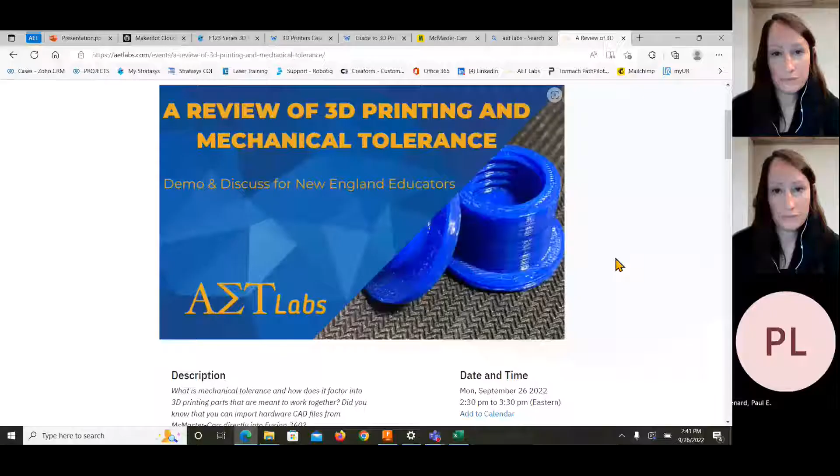Okay, so our topic today, give me 1 second here. Just gonna go ahead and share my screen. And Kristen, we're recording, right? Yeah. So I'm just popping over to the website where you guys registered.

So the topic is a review of 3D printing and mechanical tolerance. And mechanical tolerance is a very deep subject when it comes to machining, additive or subtractive manufacturing. So we're just going to touch on a little bit here today, like what is mechanical tolerance, and how does it factor into 3D printing parts that are meant to work together.

The other question, which is good for users of Fusion 360 and probably some other software too. Dave, you might be able to speak to this, maybe in SolidWorks, but you can import McMaster-Carr parts or hardware directly into projects. And when we say McMaster-Carr, we're talking about this touchstone for ordering hardware of all types. McMaster-Carr is a very well-known hardware supplier, and this is their website here.

Okay, so mechanical tolerance. I think the first thing I'm going to do is jump right over to my CAD software. Dave, you mentioned Onshape, and I have not spent much time in Onshape, but the other day I met with a teacher who had some questions about the laser cutter workflow and making 3D designs to bring to a laser cutter. I said, okay, I'm not entirely sure about Onshape, but let's just jump in and give it a try. And within 5 minutes, I was able to navigate Onshape and figure out how to work through that process.

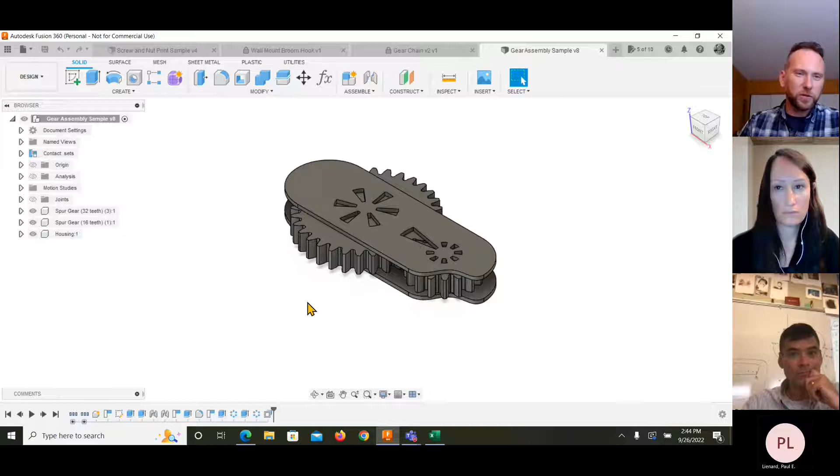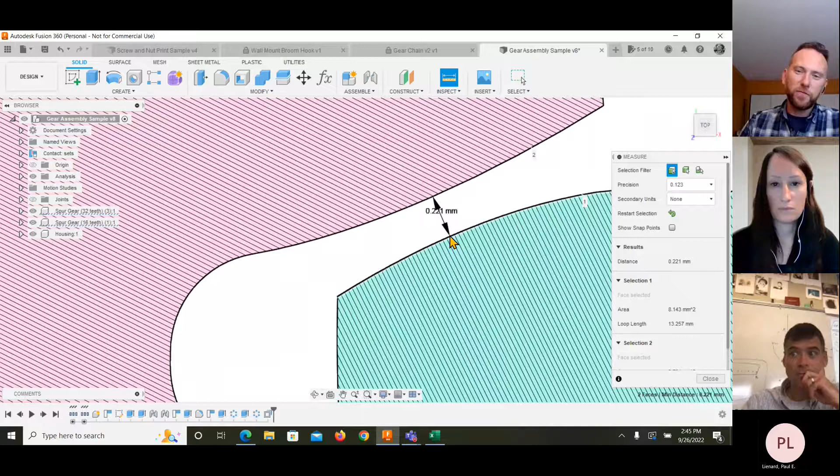Right now, we're just looking at a very tiny sample part that I designed. It's a very simple gear assembly. I think I have a section analysis here. Yep. So if we take a look at our analysis, we can see our gears are very close together. We'll take a closer look at the actual part here. Let's see if I can do a quick inspection here. So it's really probably about 0.2, but in this case, face to face, the closest point here is 0.221 millimeters apart.

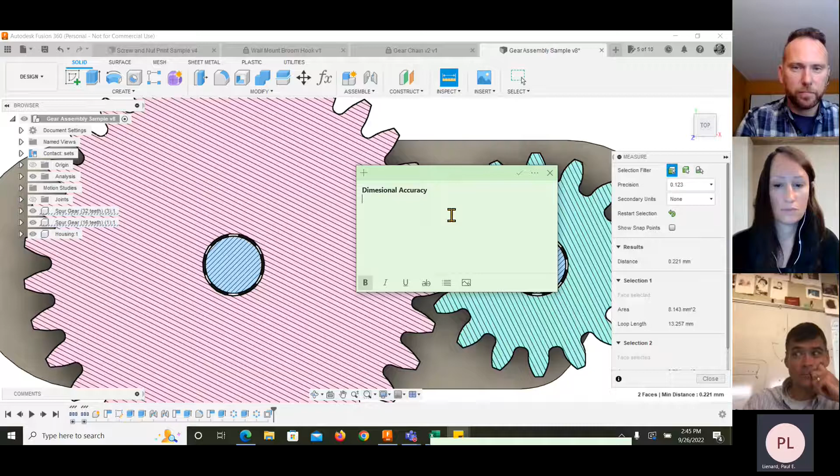And when we talk about mechanical tolerance, the other term that comes into play, and I'm just going to bring this up so we can have it on the screen here, I don't have a formal slide, but is dimensional accuracy. And dimensional accuracy is really the foundational factor before you even get into mechanical tolerance.

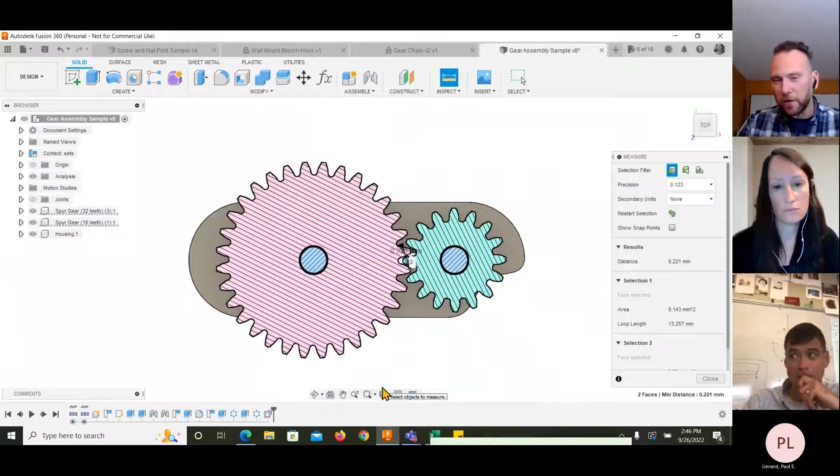So if we look at our model here that was designed with a distance between where our gears are going to touch of roughly 0.2 millimeters, and then we take this design over to a 3D printer, we have to have some fundamental understanding of the dimensional accuracy of the printer.

Now, some printers, if we pop over to, let's see, where's my MakerBot? If we pop over to MakerBot Method specifications, I just had this open. Sorry, give me 1 second here, guys.

There we go. We actually get a dimensional accuracy value here of plus or minus 0.2 millimeters. It's actually very rare that you would see this on many 3D printers. Like if we pop over to Formlabs and we look at the Form 3, and we scroll down and look at some of the information that they have here, technical specifications, they'll give you layer resolution, your XY resolution.

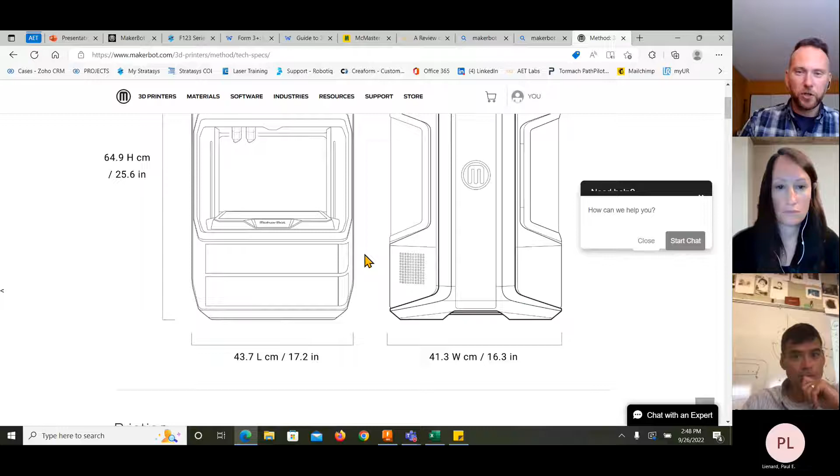But first of all, the technology is different. Resin-based printing like Formlabs, or in this case, projection-based photopolymer 3D printing, is based on pixels, as opposed to the Method, which is typical additive manufacturing where an extruder follows a tool path. So the dimensional accuracy is going to be different with respect to that.

Yeah, Adam, if I could just talk a little bit. So that's plus or minus 0.2. I just did a little thing on the conversion. So that's like plus or minus 0.008 accuracy. And I've used quite a few different 3D printers, except for the Formlabs. I just printed out something last week at QCC.

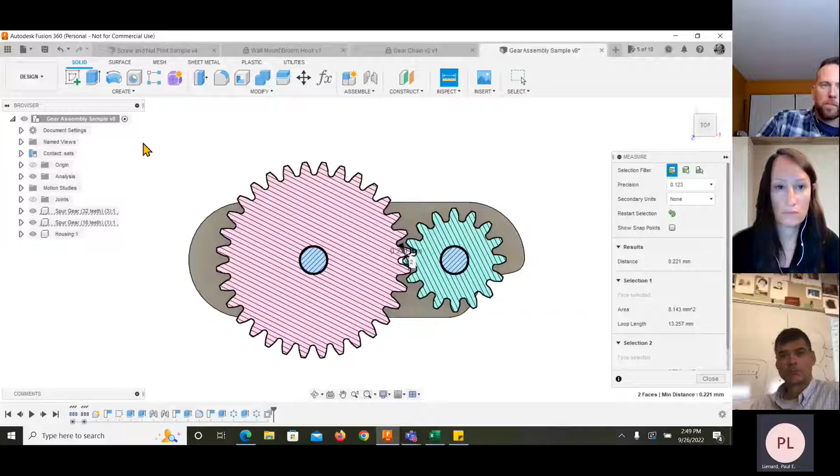And I think students in general are very misinformed, Adam. A lot of students think that if I create a model, say in Onshape or SolidWorks or Inventor, and I print it out on a 3D printer, I'm going to get exactly what I designed the part to. And I find that a lot of 3D printers have a real issue with holding tolerance. It's a problem with parts fitting together correctly. It's not as good as subtractive. And I think a lot of students think it's that easy to go from part model to 3D printing. Sure. Yep.

And I think you're right in some respects, especially with FDM, or fused deposition modeling, where it's melting plastic, right? Right. Melting filament. I will say the reason that I bring up the Method spec here is that this 0.2 is pretty broad. For mechanical parts working together, 0.2 seems like a small amount, but it feels a lot bigger when you're doing it. Exactly.

Yeah, because most of the drawings I'm doing when I'm teaching mechanical design, we're doing the standard plus or minus 5 thousandths on a 3-place tolerance. And I find that a lot of the 3D printers, like you said, this is holding 0.008. I find that is not that great. It's not that great. Yeah. So,

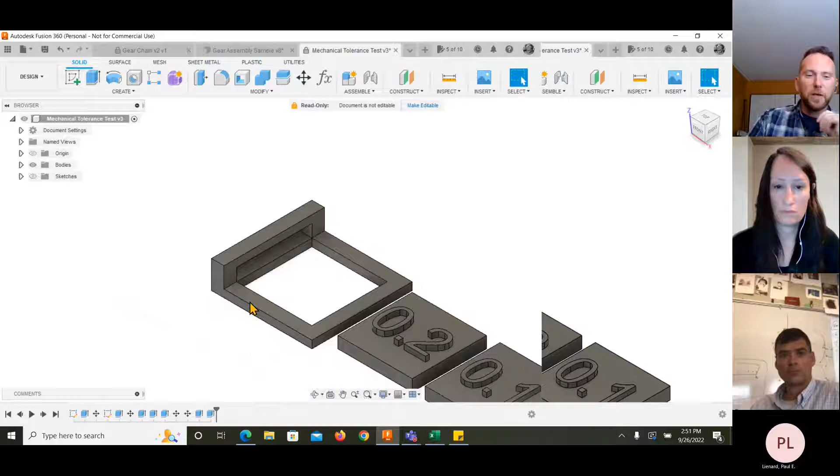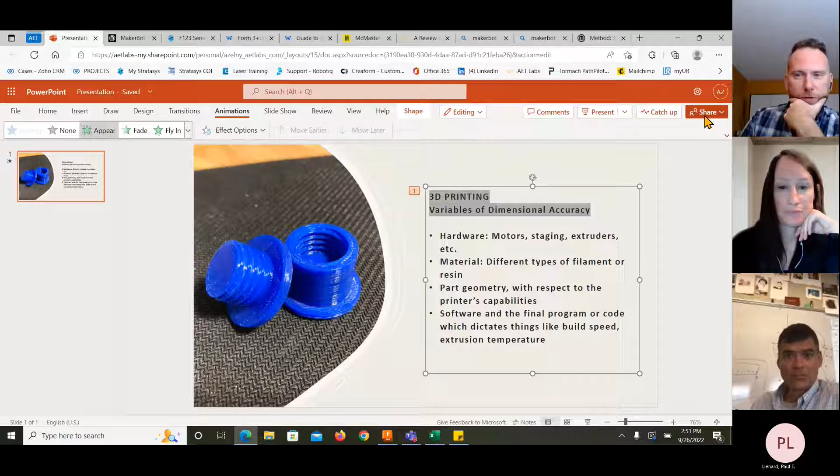before I move forward, just because, Paul, you're bringing this up, what I think I'm going to do is share this slide over here, because I think this will be a great place to move forward to. So let's just talk quickly about variables of dimensional accuracy right out the gate. All right. So the first thing to talk to your students about and to educate yourself about is that there are many factors.

And the first one being hardware. The printer itself, right? The motors, the staging, and by staging I mean the gantry, the bed. Maybe the bed moves up and down. There are going to be motors doing that, or driving the gantry left and right, XYZ, up and down. The actual extruders, what the extruders are made out of.

I mean, there are 3D printers out there, like Lulzbot as an example, where they have parts that are 3D printed. It feels like maybe 25% of the printer is actually 3D printed. On the other hand, we work with Stratasys 3D printers, which are higher end 3D printers, and the hardware is a lot more consistent and solid. So just the printer itself plays a huge role.

If you set up 3 different 3D printers and you printed with the exact same filament, I'm talking about the same manufacturer, same filament, you're going to have a different dimensional accuracy in the 3 machines just based on their hardware. How well were they built and designed? And let's go on to other factors that still play a role no matter the printer quality.

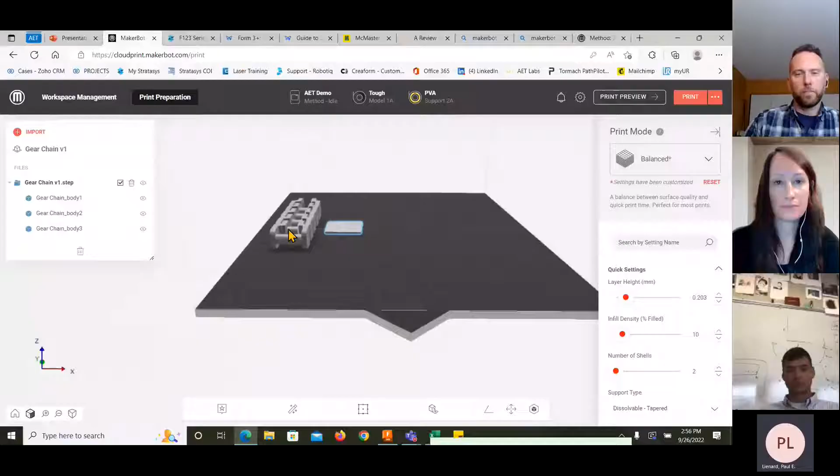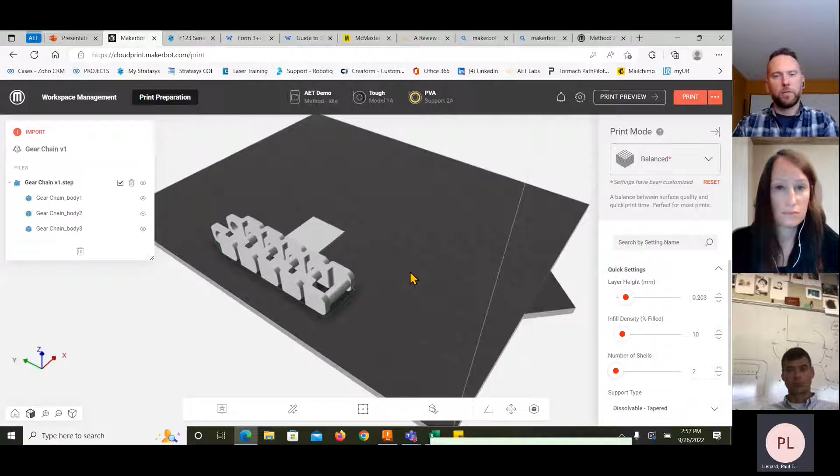One other question I had while on the subject of dimensional accuracy. One thing I'm noticing, Adam, on FDM printers, and I wanted to get your idea on this, is on through hole tolerances. On FDM, is it true that the nozzle kerf, like I use a 0.4 millimeter nozzle, is on the center of the geometry? Because I noticed that on machines I've been using with FDM, everything generally comes undersized about 10 to 15 thousandths, which would be about the 0.4 millimeter kerf if it was right on the actual line of the circle. Or is the compensation to the outside on a circle?

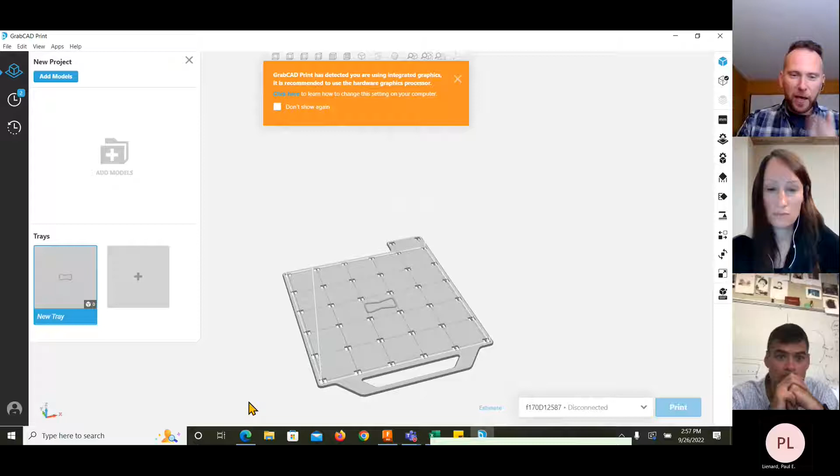Okay. So this is a great question, and I'm gonna pull out the big guns for this. I'm gonna open up GrabCAD Print, so we can actually see a toolpath and a better simulation. What I have open in the background is MakerBot Cloud Print. Cloud Print is actually very versatile for changing settings, but as far as the simulation and understanding what's going on with the toolpaths, it's not as clear. So give me one second here. Let's bring open a model here.

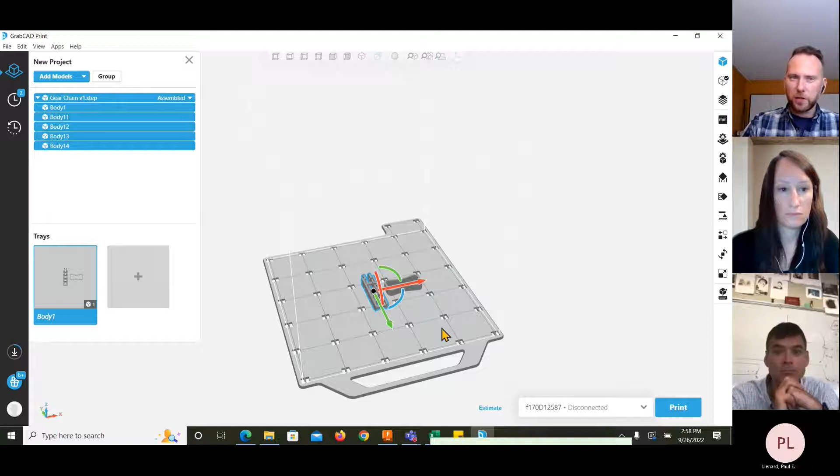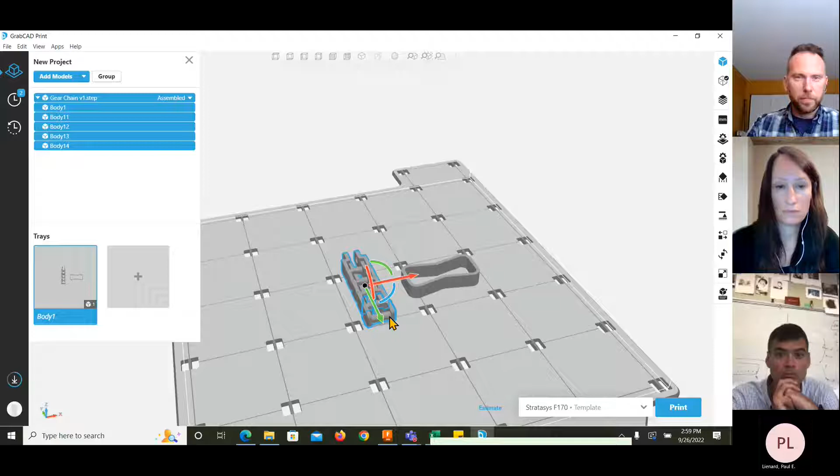So GrabCAD Print, Dave, I don't think you guys have a Stratasys machine, is that correct? Correct. And for anybody watching the video after the fact, GrabCAD Print is the proprietary slicing software that you would use to prepare models. What I'm going to do here is just pick up a template for something FDM. We will do an F170, which is now their kind of entry level. And when I say entry level, I mean their least expensive printer, but it's still a very, very high quality printer. Right. And let's go into our slice preview.

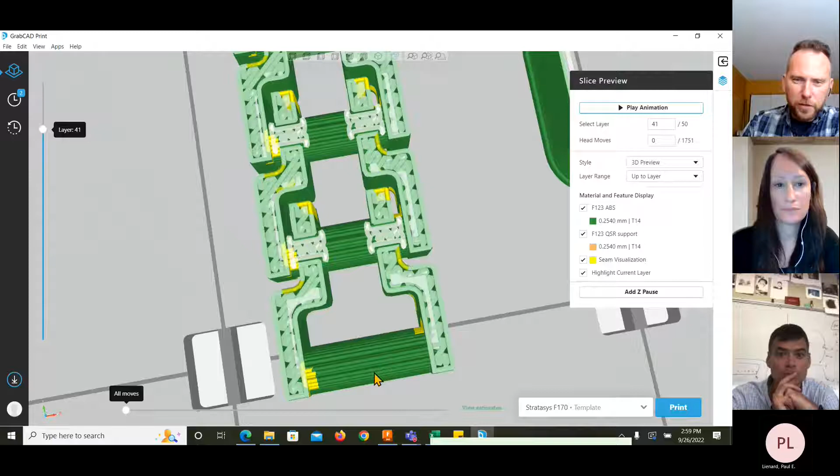So Paul, correct me if I'm wrong, but your question is whether or not when the extrusion is happening, the tool path, because right here we're seeing a very good, nice high quality rendering of the bead of plastic that's being extruded, right? Your question is, should we be expecting that that tool path is right in the middle of this bead, or the bead is accurately being laid down, right?

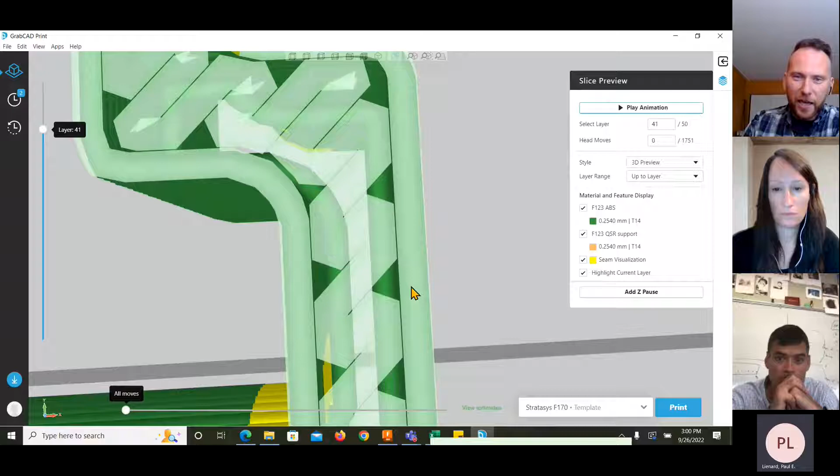Yeah. And my answer is, well, for a Stratasys system, surely, but my answer would be yes, that it would not be offset. I would say it's not common for a 3D printer's tool path to be on the outside or the inside of the width of this bead. Right. Now, depending on the system that you're working with, you're going to be working with those variables that I was talking about earlier.

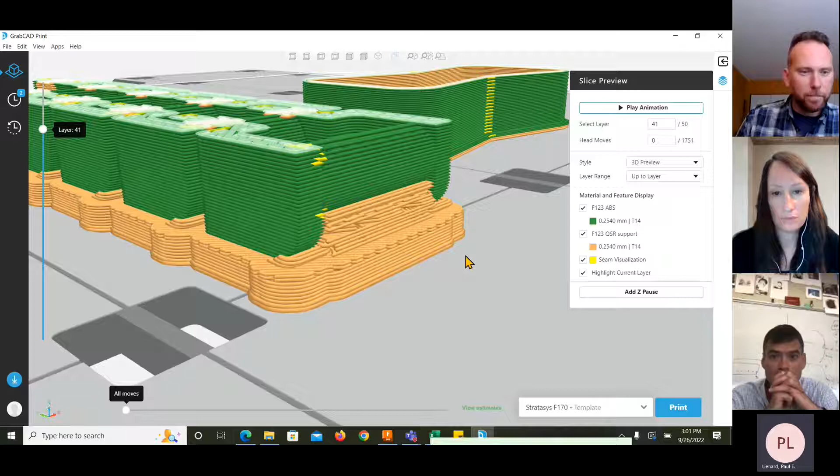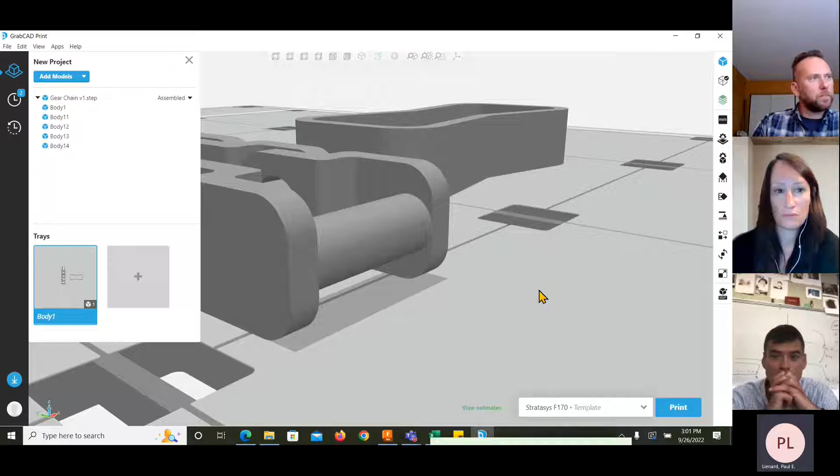So Adam, that being said, when you have a 0.4 millimeter nozzle, which I guess is like a standard size, right? I think it depends on the system, but yeah, I've seen 0.4 be very common. Yep. So with 3D printing, and again, I'm kind of new to a lot of this too, we're gonna have an issue with tolerancing. If it's laying the path down on the center of the geometry, both on the through holes and on the other dimensional accuracy of the part, it's not gonna come out 1-to-1. It's just not gonna happen.

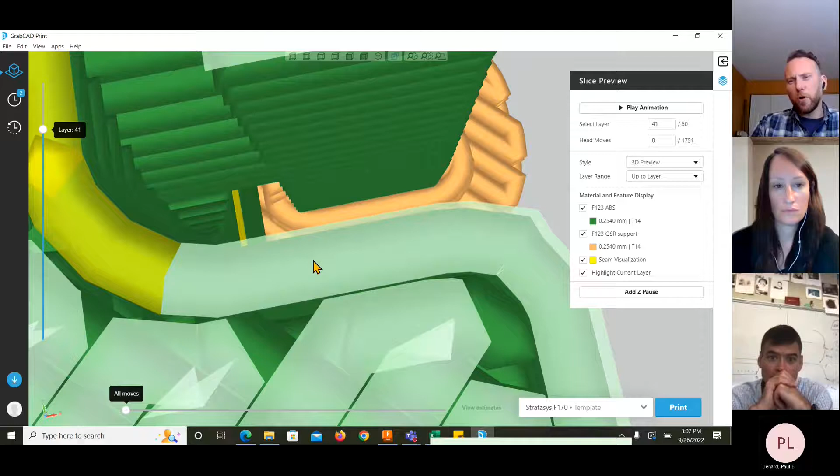Let's talk about what might be happening in the back end, though, right? The people that are engineering this software are not just saying, okay, this is the tool path and that's the end of it. They are absolutely accounting for the fact that this line here has a width. So let's say the width of this line is somewhere around 0.3 or 0.4 millimeters. Their code is automatically going to offset the tool path based on the final geometry of the part.

Okay. And again, this depends a lot on the software, the software engineers, the manufacturer, the company. There are so many variables. But let's demystify this. What's the solution here? Yeah, that's the ultimate question, right? Because then we start fudging the part and everything, and so on and so forth.

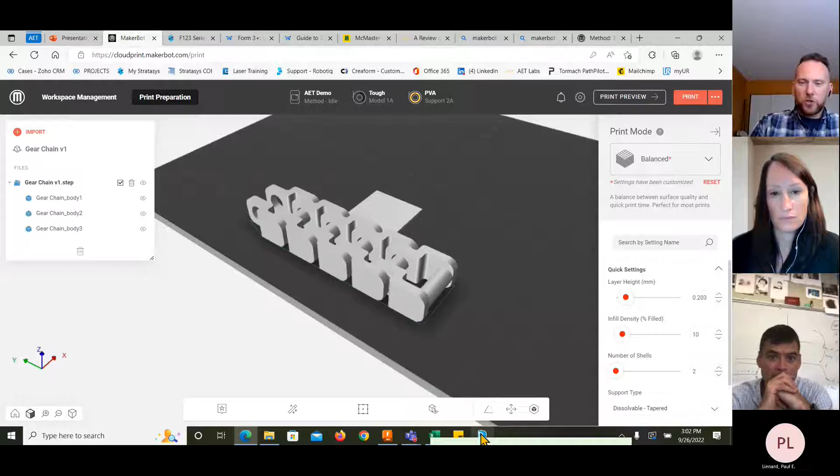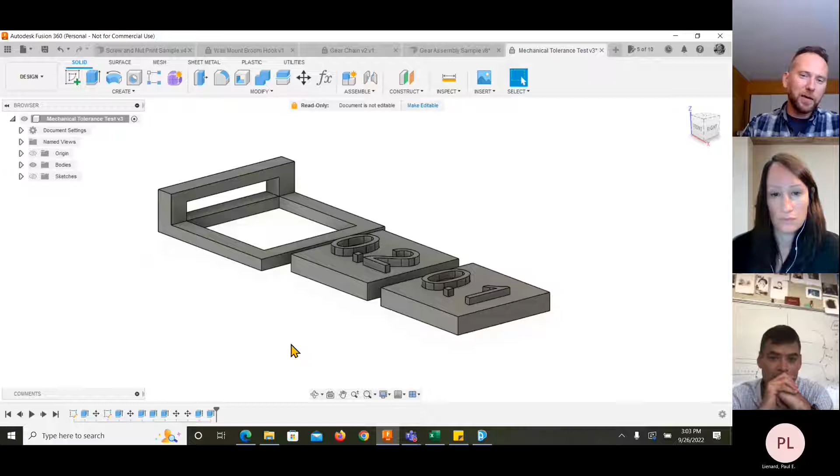Right. So my solution is to start with a design, kind of a control point, of something like this. This is nothing fancy at all. And the whole point of this is to make a part that tests X, Y, and Z mechanical tolerance. What is the tolerance and that dimensional accuracy gap that we have when we're 3D printing on a specific printer with a specific material.

And once you figure that out, and you could run like 5 tests if you want and find the average between them, especially if you're working with a MakerBot Replicator, which at this point is kind of an outdated printer but still a workhorse, you find that sweet spot and then you document that. You're printing with PLA and you learned that your leeway on that MakerBot Replicator is between 0.1 and 0.25 or something like that, right?

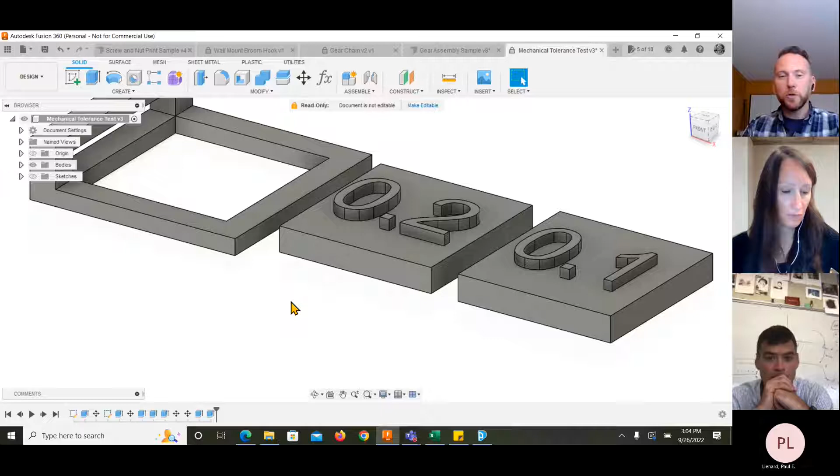So the first thing you're doing is making a tolerance test, some test parts that you're going to measure. You don't even have to do what I do here, I just like to have parts that interface together, but you could simply do a series of shapes: cylinders, pyramids, cubes or rectangular prisms, and get your calipers out, take measurements and document those measurements. So the first thing is to make those test parts before you move forward.

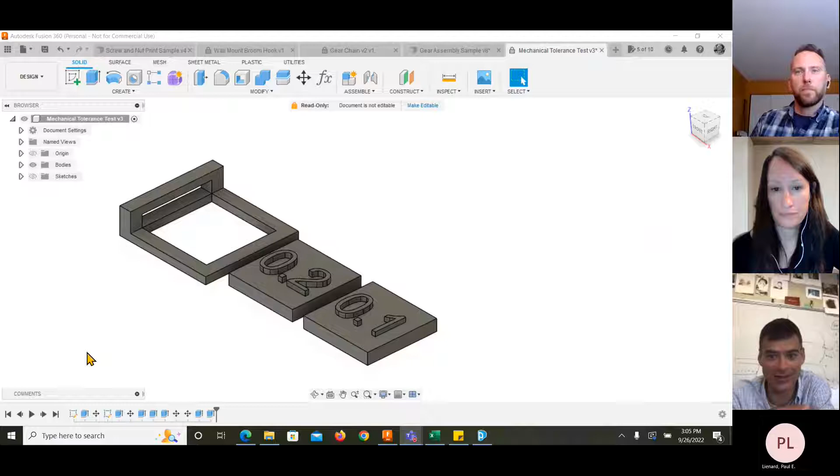Can I ask a question? Yeah, please. With my students, we've been mostly doing the guess and check approach. And I love the idea here of actually being very systematic about it, actually using forethought. If you're saying you have a tolerance of 0.2, 0.1, is that on the diameter, or where does that measurement begin and end? Sure. All right, let's take a look at this model here.

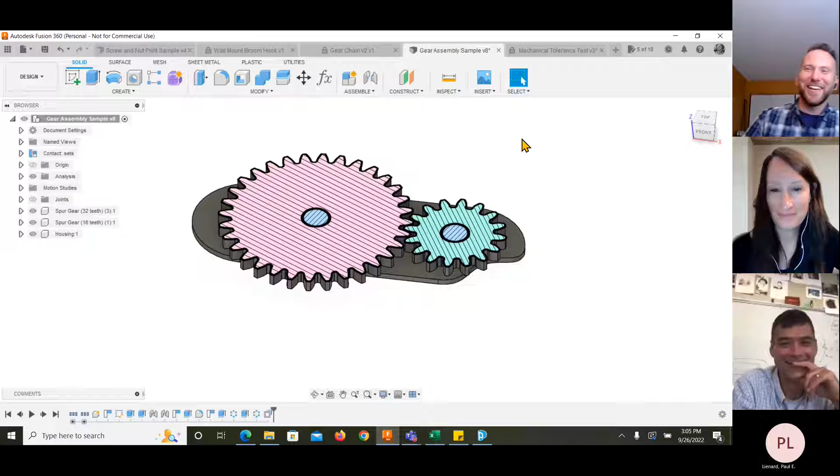You're speaking to a person that was an engineer for most of college, but then ended up with a psych degree and is now teaching mostly engineering and physics. You're making it sound like I have to give a really, really intelligent answer. Okay.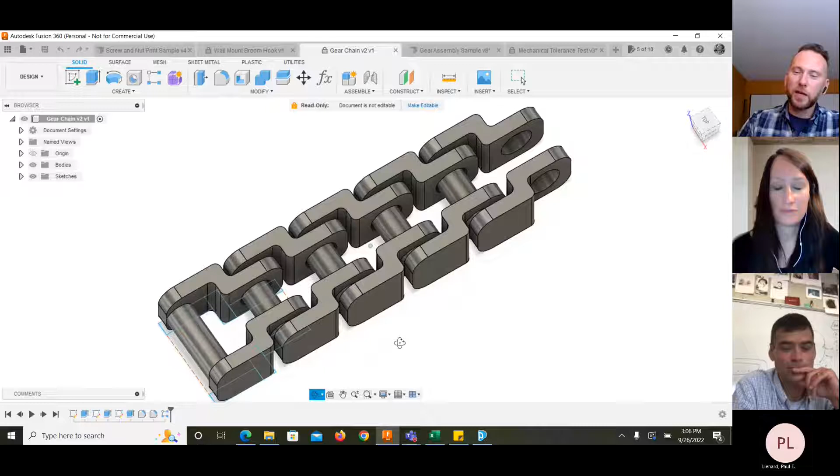Okay, I just designed this today. It's a chain link, specifically for the MakerBot Method. So I designed it to be printed already assembled. It's printed in one go. I'll actually show you the physical model in a few minutes.

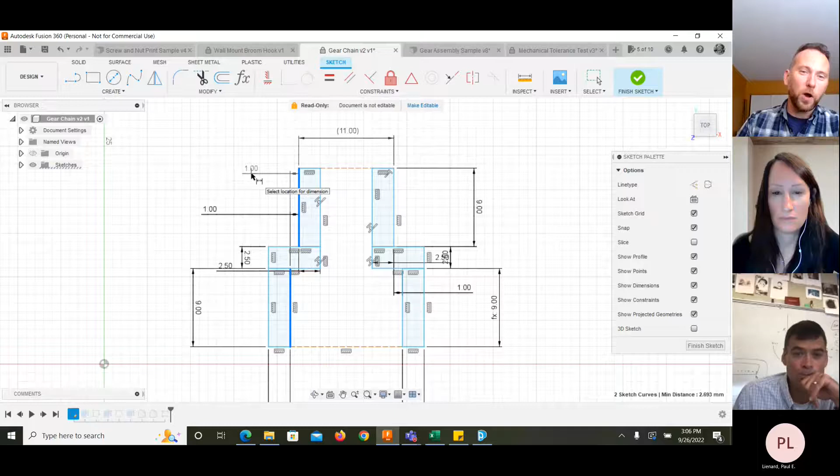And let's take a look at our sketches here. So the main thing that matters in this case is the first sketch here. So here's my sketch of the top view, and I have a couple of things here that we want to look at. We have the dimension, because this fork, the top fork here, is going to be fitting into the bottom here. And our dimension there is 1 millimeter. I went really loose there just because I wanted some play. Now I know with 1 full millimeter, I'm not going to have any issue at all.

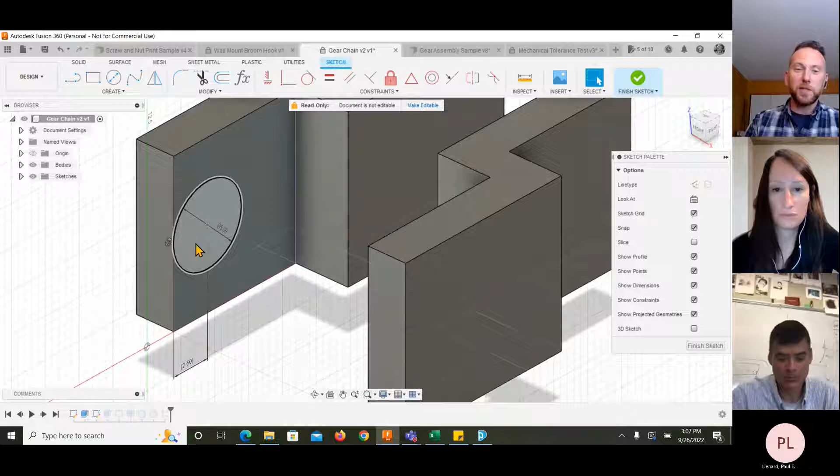All right. So moving on from there, I have about the same distance here as well. Probably a more important one are the cylinders and our bearing opening here. Yeah, your clearance hole. So let's take a look at our first cylinder. It's a 5 millimeter diameter, and my goal here is that this can be whatever. I just want it to be substantial, and I want it to be a solid anchor point. So that's going to sit at 5. And then we have our hole in the back here, which I've done to 6, right?

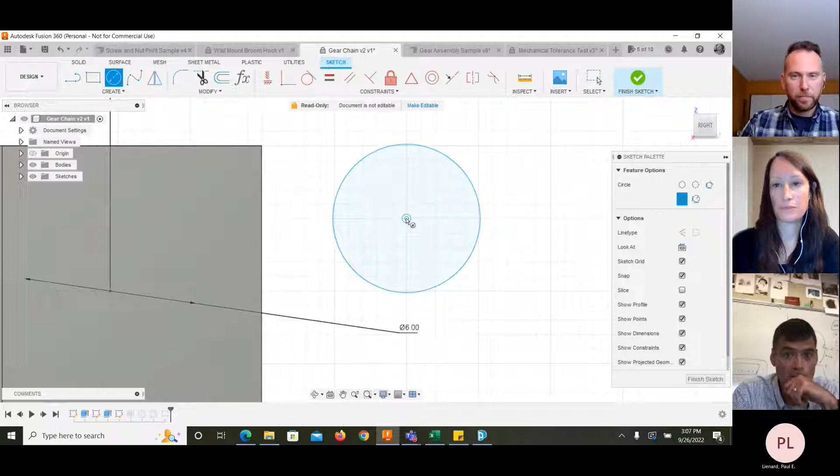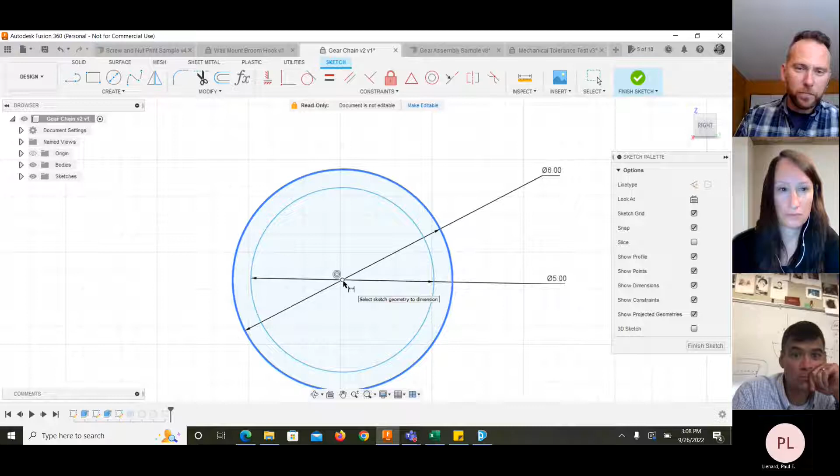So what we're looking at here, just going to draw this out right here. So you get a 20 thousandths radius clearance. Whoops. I think I just did my measurement wrong. Okay. Yeah, and I don't think I can actually give a radius measurement here, but we know that it's going to be 2.5 and 3, right?

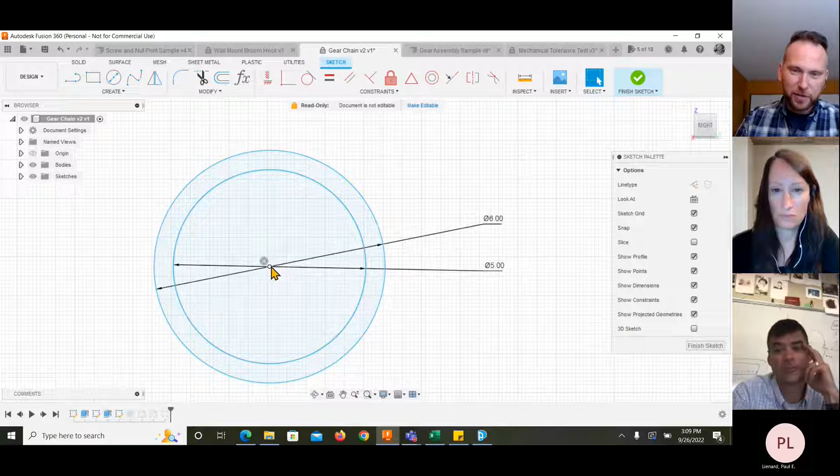So that's an important value, not the diameter. This is the diameter. The radius is the important value, right? So we have 2.5 here and 3 here. And the difference is going to be that distance from here to here. So that's our 0.5. And that is, Dave, what we're working with here: we want the distance between here and here. Now, obviously for circles, it's going to be universal all around, right?

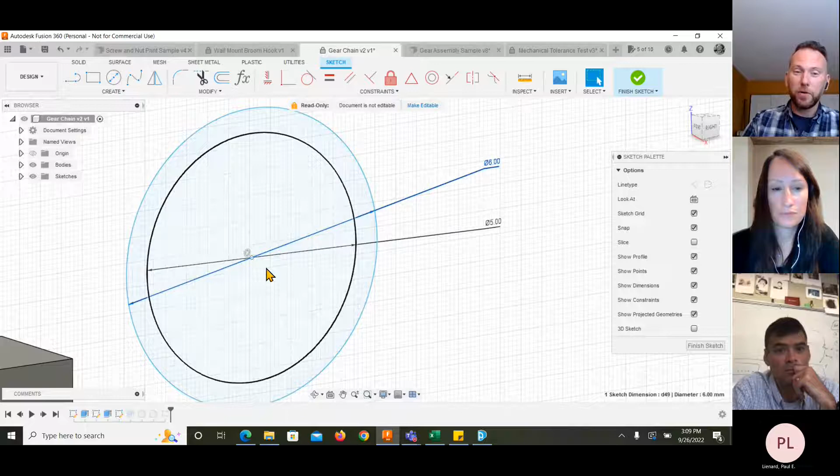But with a cylinder, with like a dowel passing through a cylinder, the total distance is going to be important, because this thing can move around, right? It will be able to kind of bounce. This edge will meet here and be able to flex between here and the other side. So really, we would be looking at a total of 1 full millimeter tolerance.

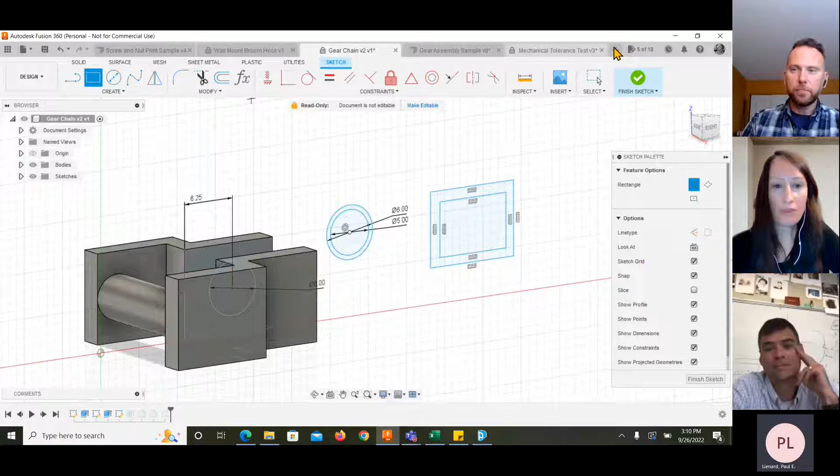That, Adam, that's really the challenge I'm finding. That's the challenge with 3D printing, is knowing how tight or how loose can I be on the printer. Right. And also, like you were pointing out earlier, the chemistry of the different materials, PLA, ABS, carbon fiber. That's really the challenge: designing your part to give you exactly what you're trying to achieve, with the right type of tolerance.

Guys, we're kind of cruising forward here. I want to just show you one quick thing before I talk about a couple of other things, because we do wrap up around 3:30. So one of the things I wanted to cover was bringing in McMaster-Carr components so you can experiment with the students. And Dave, if you can't directly import to Onshape, you can always go straight to McMaster-Carr's website and find some hardware.

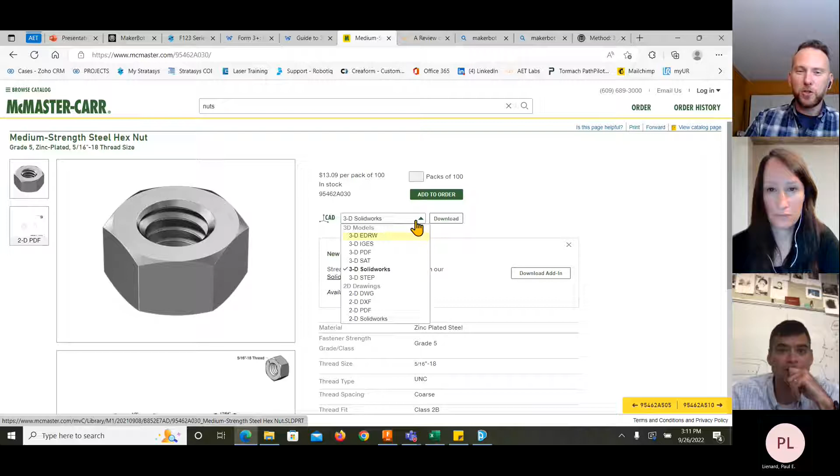And look at this, CAD. Right away, a few clicks, you get to an item in McMaster-Carr. You can go into product detail. You can get some specific information, but look at this. You can go right into this CAD dropdown, and you can select any of these and export the actual CAD model of this hardware. And Paul, I think you'll like this too, because how are all of these components made, right? They're either made by metal molds, or they're made by subtractive manufacturing, which is going to give a very, very tight tolerance, right?

I've used McMaster-Carr my whole career, Adam. It's great. All my fasteners and brackets and all that stuff I download, like STEP files. Yeah, Dave, if you want to bring it into Onshape, you could just download an STP file and then convert it over. It's really great to have that website.

Same process here, except Fusion just gives you an insert McMaster-Carr component drop-down from the insert menu, and it gives you a small pop-up window. And then I can go in and find the specific screw that I want. Saves a lot of time.

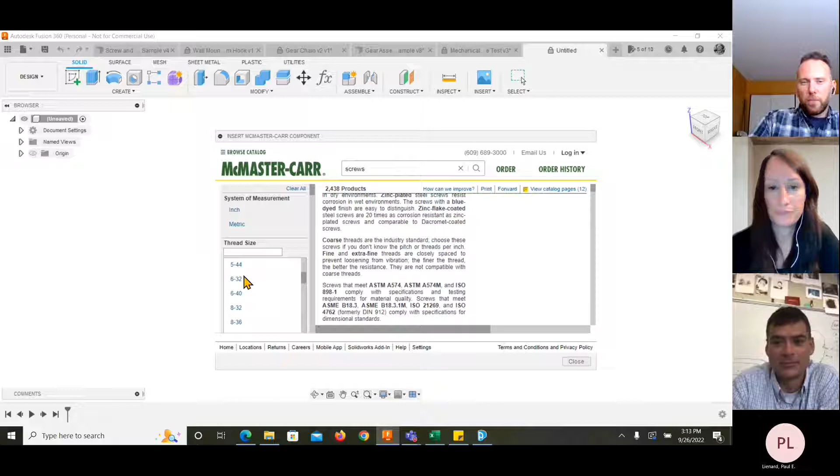Yeah, it's nice. Can I ask a question? Just a little tangent. Are you familiar with the Fusion 360 Chromebook experience? Has that improved? I don't know. I've worked with some teachers who are using it, but I have not used it myself. I played around with it. It was so laggy. I just stepped away and was like, no, not going to happen. It's very new. Yeah, it's very, very new.

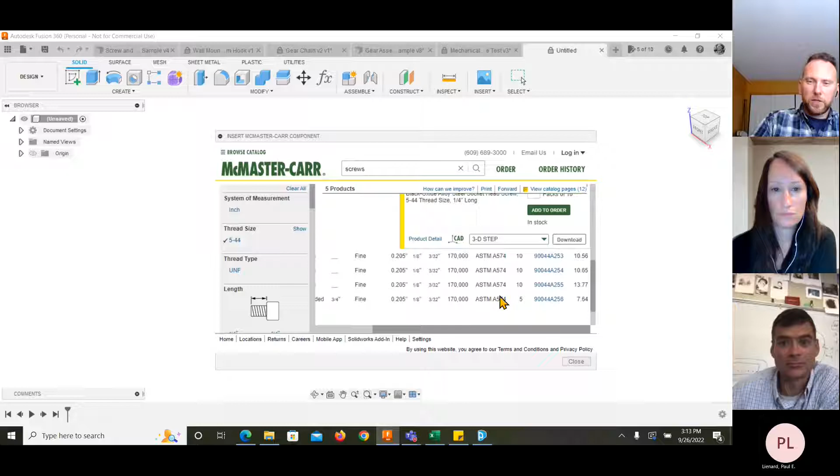Okay, so going into STEP and download. And just like that, we have our part. Now, the reason that I like this as an application in the classroom is if I go and find the nut counterpart for this and 3D print them as they are, you should have your students do it. Have them import a screw and a nut, or any parts that are meant to fit together, but definitely screws and nuts, and have them 3D print it, and it's not going to work.

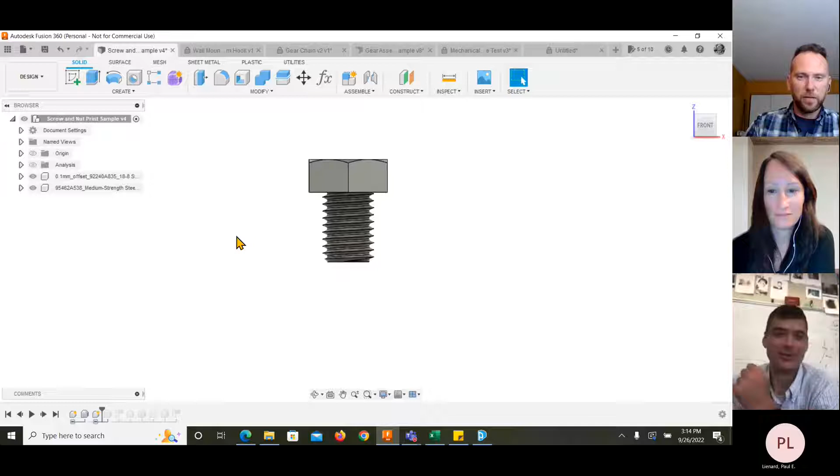Yeah. Adam, you're the only one that's ever said that. Seriously. I am? Yeah, because a lot of teachers believe, like I was saying earlier, that you can create a model and print it out in 3D and it's going to work. It's a little bit more involved than that. Well, first of all, threads don't print very well usually.

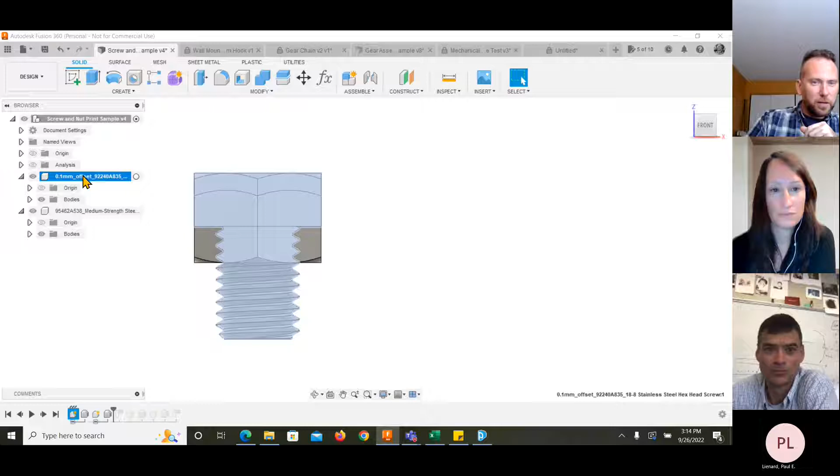Let's take a look here. I have to bring this over, I think. Here we go. So these are the components. These are meant to fit together. If I ordered them from McMaster-Carr, they would, right? They're machined metal, steel in this case. And let's just take a look at a section view here. And move this screw. So this is a section view that's directly in the middle.

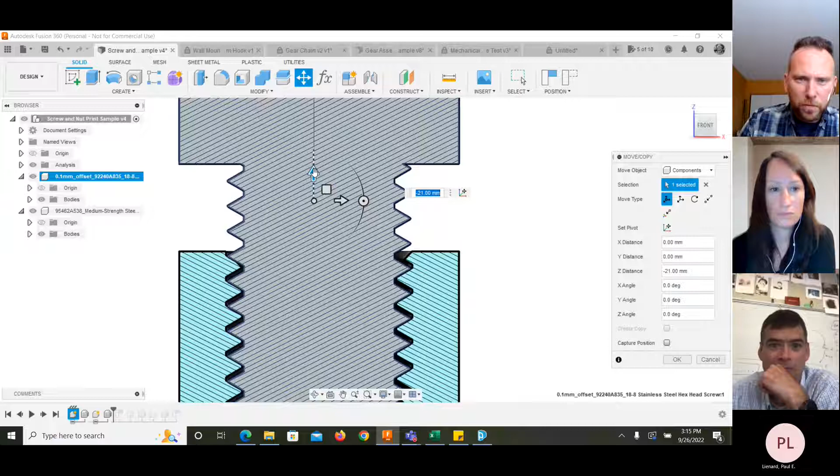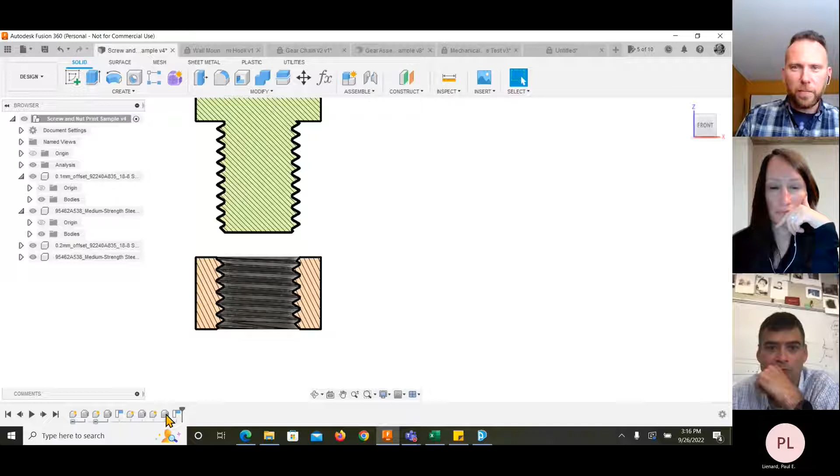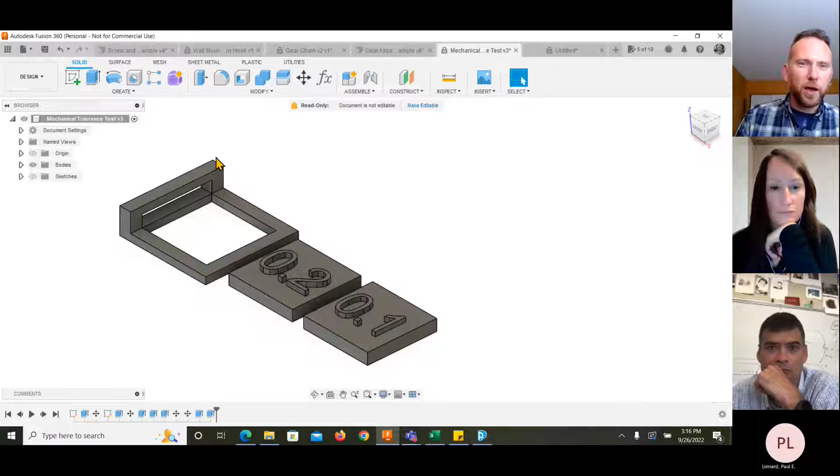Oh, you know what? This one may have been affected. Hold on. So that one I had already changed. I don't know why it's not allowing me to go back. Base feature. Let's try this. I think it's not actually capturing the changes that I make. So let's just go and do offsets. I think it's going to take too much time to do this, but what I was hoping to show you is if we had these in their original imports. Oh, this might be it. There you go.

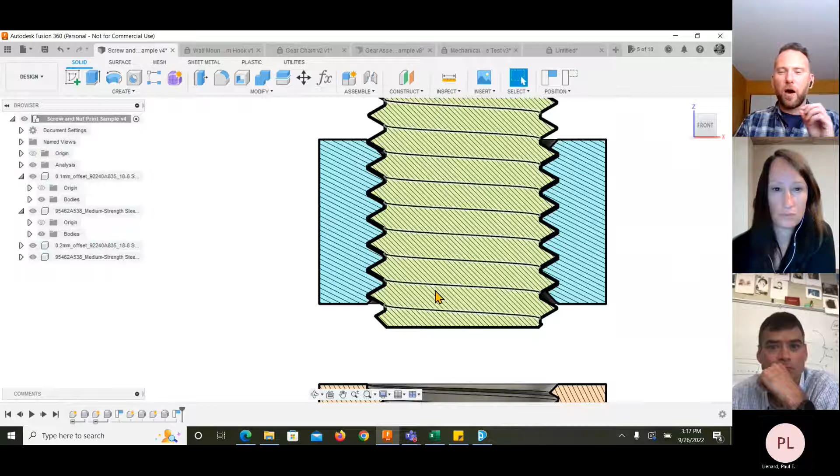There it is. So this right here would be flush, right? This gap right here, they would be touching each other. There would essentially be no gap there because the tolerance on the tools that McMaster-Carr or whatever company they contract with is using is so good that there's barely any tolerance gap.

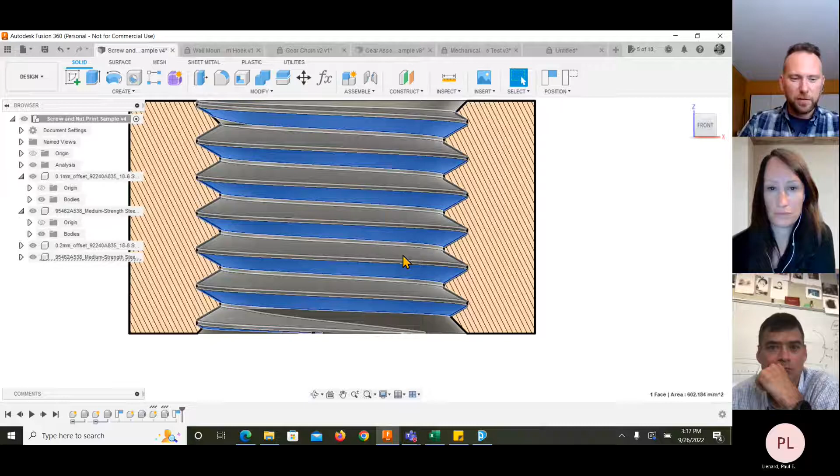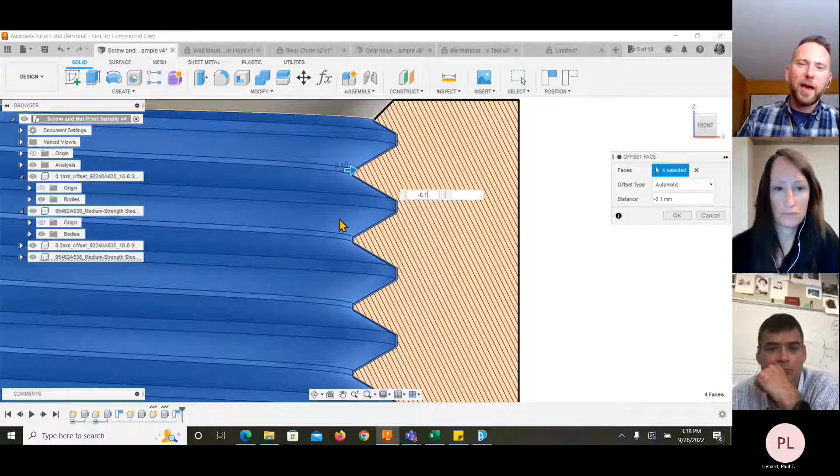So in bringing this into my CAD software, I can go in Fusion. This is pretty easy, but I can actually go in and select faces and do a very simple press pull. I think I might want to do it to everything. And right now it's giving me a value. There we go. And I can say negative 0.1. And see, it just bumped out there. And if I go in the other direction, 0.2. Is it doing 0.2? A little laggy here. I have a bunch of things open, but you guys get the gist of it.

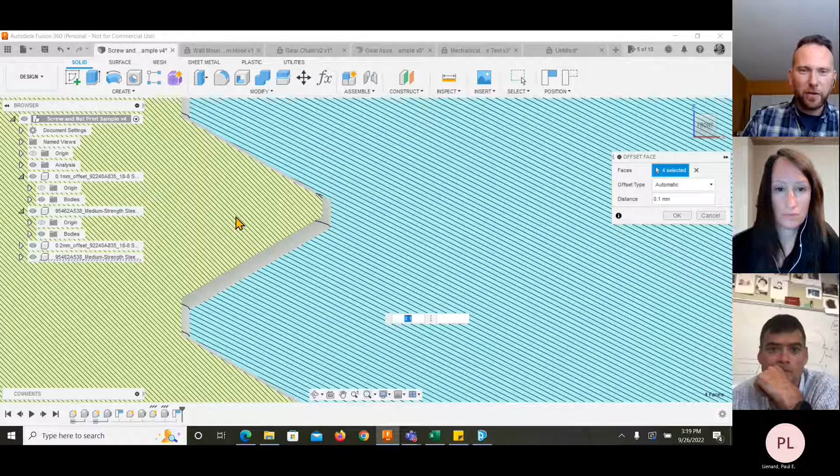So we're changing the geometry with a pretty simple process of press pull by adding either a negative or positive value. In this case, it would be positive because it's pressing inward, and it's simply scaling it down uniformly. So we have a little bit of a gap here, a little bit of a tolerance that allows us to 3D print something that gives us a final object that's plus or minus 0.2 millimeters off. And on that note, let's go over to my workbench.

All right, can you guys see this okay? Yes.

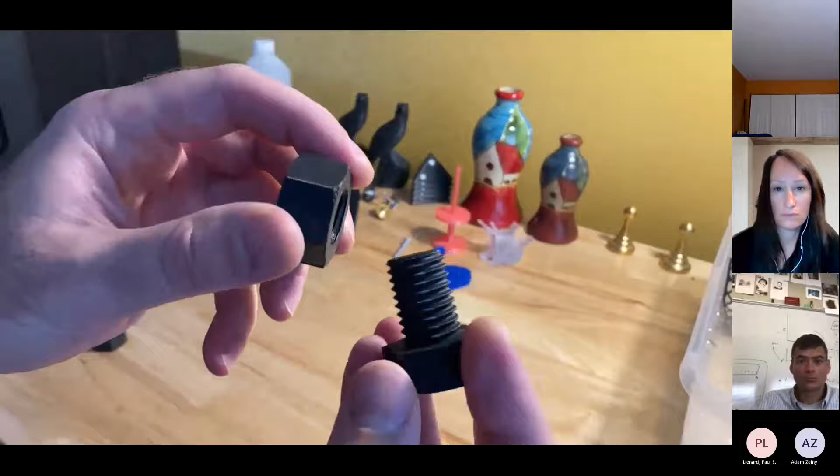Let's see here. And here is the result of that. I think I did a 0.1 and 0.2, right? Yes. And the threads, okay, it's smooth. It's very smooth. Yeah, it's huge, right? So that's one drawback. If you tried to do something very much smaller, something like this, for example, you would be hard pressed on an FDM 3D printer.

The other thing I want to point out is this was done on the Method. Now, this here was done on the Sketch. And if I hold this close, I don't think I changed the end of the threads. You can see they're pretty sharp, and it came out pretty good. But some printers may not yield that good of a result. So you might have to soften the actual edges of the thread.

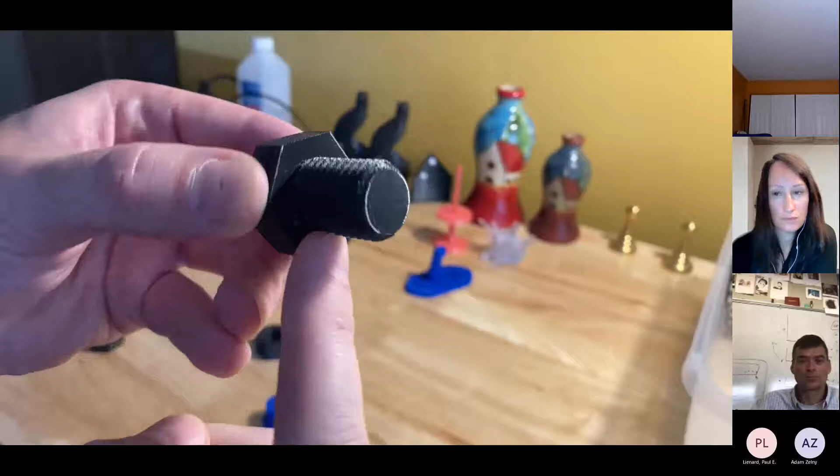But this was printed with a soluble support, so I could really get away with some weird geometry. One interesting thing with respect to soluble supports: can you see this ridge right here where it looks like it's elevated? Yeah, I was admiring. So this was printed in this orientation, and there was soluble support right down here. So this is a factor that comes into play with soluble supports.

In MakerBot, you can go in and say, I actually want to experiment with having this be further or closer to the model. But in this case, it really didn't matter. It still produced a really good fit. All right. So this is really good. The tolerance on this is tight, and it's a really good fit.

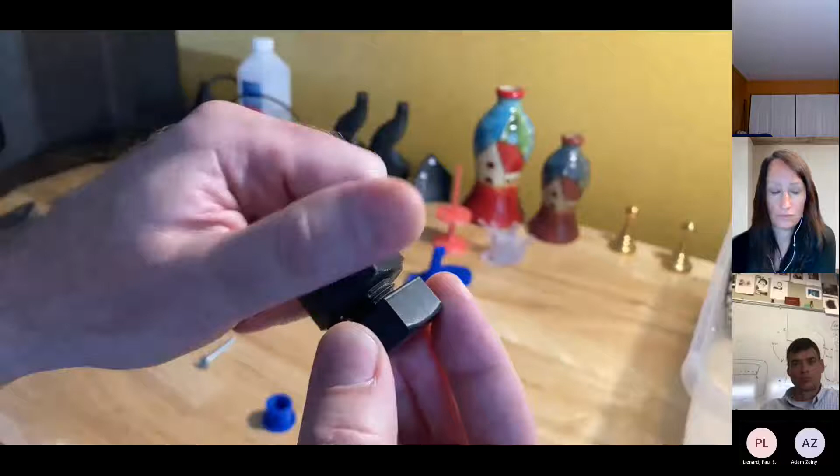And why couldn't you use this in a prototype robotics project or some sort of electronics housing, right? It's a pretty strong piece of hardware, and it's not even printed 100% fill. It's hollow inside to some respects.

So let's see what else I have here that I can show you guys. This is probably one of the least practical ways to use 3D printing for mechanical parts, a bearing, because it's just plastic on plastic, and it leaves it very rough. But it still will spin, and it is still an interesting project to experiment with for tolerance.

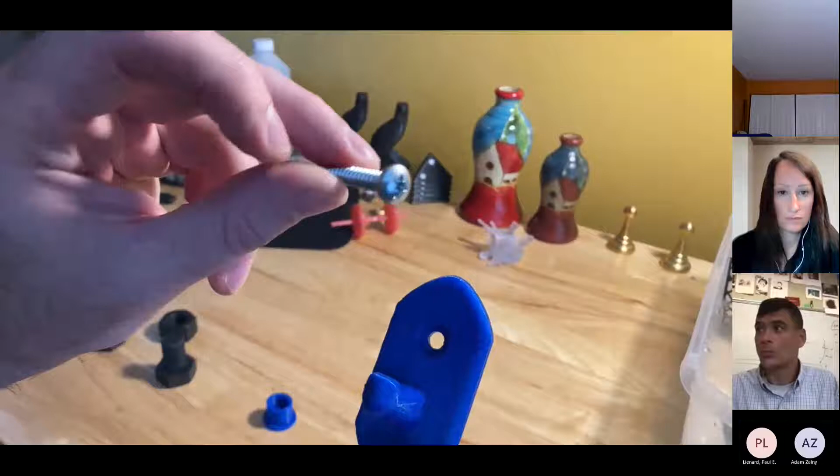Another one, this is a very simple application. I was telling Kristen about this when we were getting started. In our washing machine closet, I just put a screw in the wall to hold a broom, because I didn't want to take the time to do anything else. And eventually I designed this little broom hook. This is great, because now we're designing to interface with a subtractive manufacturing part and with a 3D printed part.

And here you can actually see there's quite a lot of wiggle room. I'd need to go back to the design to see what I did, but there's a bit of movement here. All the pressure is in this direction, so I wasn't too concerned about that. But that's another thing to talk about with the students, right? Where is the load? Where is the pressure being applied? Where are the parts actually touching? Right.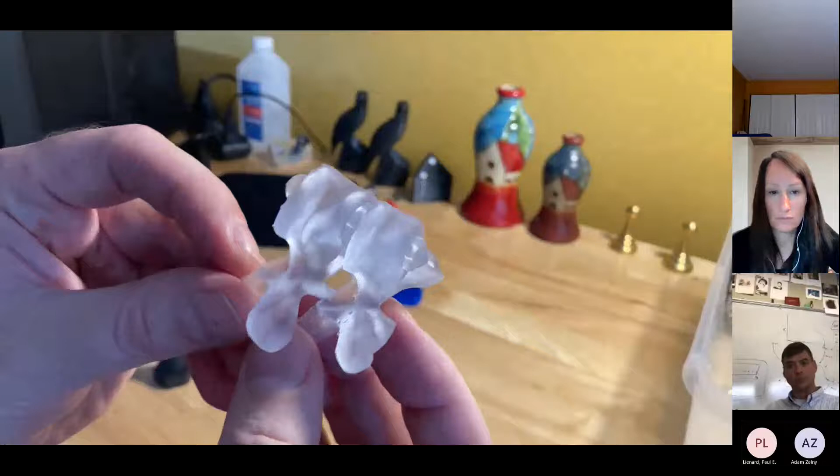So this was a cool, simple project. Up the line, you can actually see the ridges in this, but this was printed on a Stratasys Origin machine, which is a very high-end resin printer. But this is something you can absolutely design for FDM. And this has a little ball and socket joint.

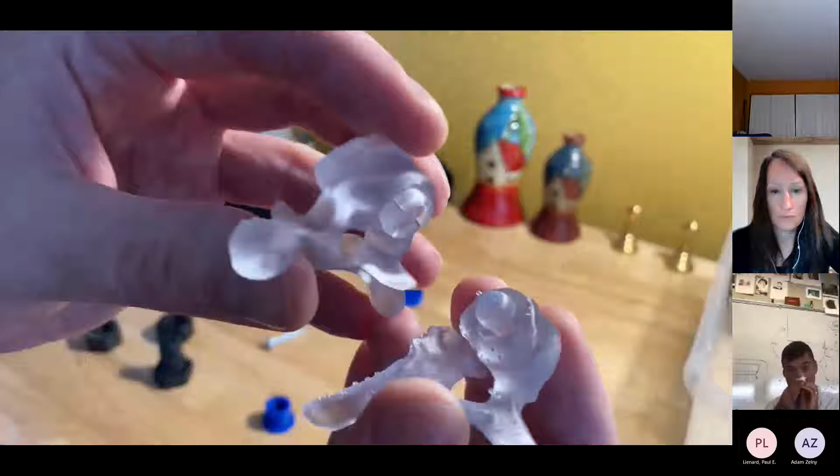You can totally make a ball and socket joint with FDM. At this size, maybe this is kind of pushing it; this is maybe a little too small for FDM. But yeah, this is great. What I love about stuff like this is you're having your student design an anatomical model that could then be passed along to another department of the school or another class, a biology class.

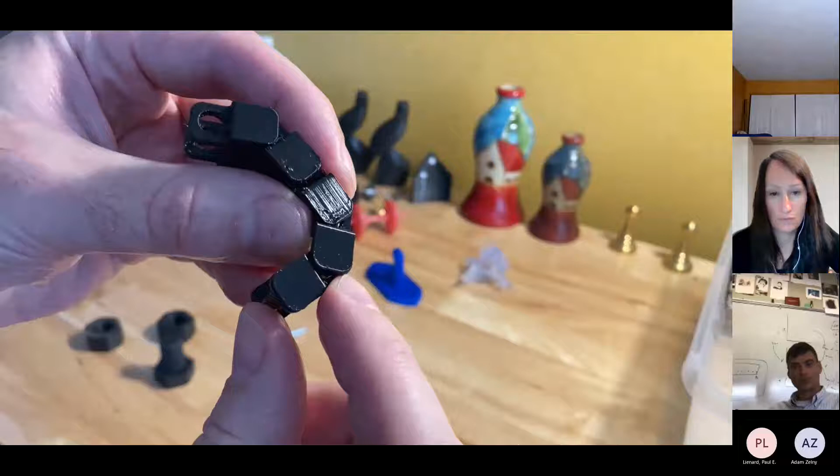And then I think finally here, I just have this guy, which is in the water bath. But here's the... Oh, there's your link. Yeah, here's the link. Yeah, and it works. It works great, except I failed at one part of the design, and that was the range of motion. I didn't fillet these corners enough, so you can see that it'll hit the corner. If I filleted them more, I would have a broader range of motion.

But then again, for something like this, do you need it, right? Depending on how much you need it, because look at it. I mean, it almost curves like 180. But mechanically, this is certainly a viable option for a design if you're prototyping something and you want to 3D print some chains.

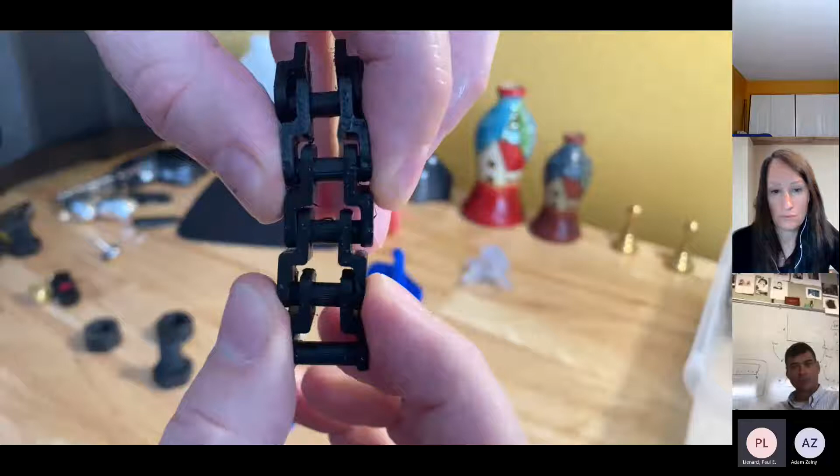If you remember when we looked at this design, the gap here was 1 millimeter, and it's huge, right? So the Method's precision is pretty good. And what did I say it was? 1 full millimeter inside as well, I think. Yeah, 40 thousandths. Yeah. So it's pretty loose, but when you're doing something like this, you might want it. Good prototype. Good one.

So yeah, but this is cool because this is usable, right? And that was printed on FDM. That was FDM. This is the MakerBot Method. The MakerBot. Oh, good. And I think we'll show you guys. So this is the Method and the Sketch next to each other.

Yeah, the Method's pretty neat. It's MakerBot's top end printer in this case. It's a pretty nice setup. But as far as when you want to stop designing for this type of printer, where you have to clip off the supports, and have a little bit more versatility with your geometry like this, so you don't have to assemble, it's already assembled, the Method's a pretty cool option. And then, of course, the next step up would be Stratasys.

Cool. All right. Well, that brought us pretty far. Let me give you a few minutes here. Do you want to comment on anything and touch base on something I covered? I'm relieved to hear other people are doing the same stuff. And I like hearing different ways to tie the teaching of this into projects. So I'm sitting here taking some notes. I'm definitely going to tackle a couple of these as little projects for kids to do, and then, okay, go run it and let's see what that looks like.

Yeah. Adam, anything popping into your head now that you're kind of in the space? Well, here, I'll show you. You asked me to show some stuff that we've done, right? Yeah, sure. Can I show you my screen?

Hopefully this assembly goes. How do I share my screen? You should have a share icon if you're in the Teams app, maybe on the bottom. Are you able to share? I'm not an organizer or presenter. Okay, I could switch you to presenter and then you'll be able to share. I still have my training wheels on. Oh no, it's not you. I just have to make you a presenter. Okay, I just made you the presenter. There we go. Window. Oh, it says I need to give permission. Privacy, where's that? That sounds like something on your side. Oh, darn. Ready? Yeah, let's just do it. By all means, go ahead. There. Oh, nice. Okay. Let me see if I can make this work.

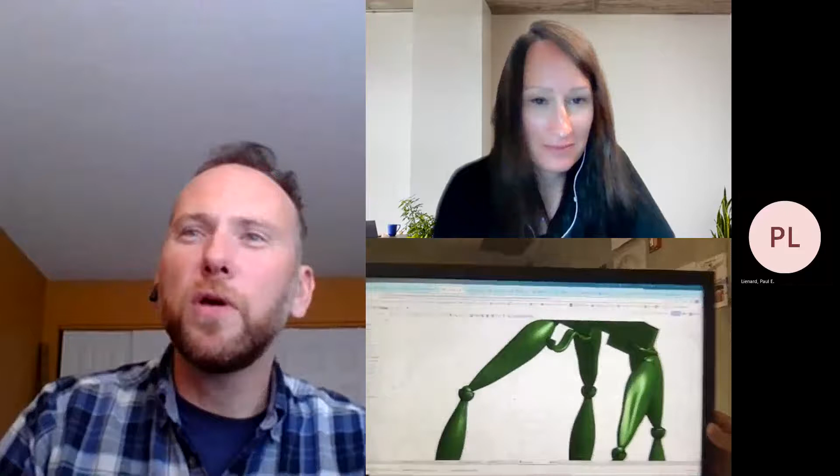Actually, Kristen, if you pin him, will the recording see it like that? It's just saying pin for me. Oh, spotlight for everyone. Yeah, there we go.

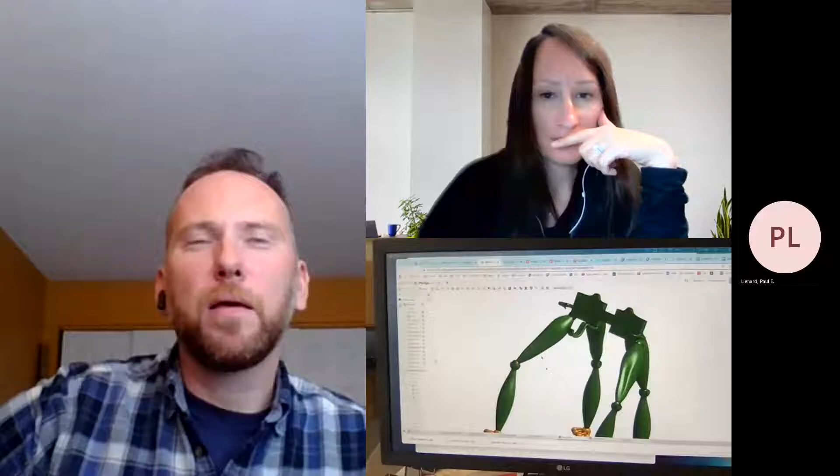Okay. So this has got slider joints, right? So the assembly, I don't want to mess up their project. So this will slide forward and back. I'm afraid I'm going to blow up their project.

Then you also have a whole bunch. You've also got a slider in the legs, so it can go up and down to account for the different leg positions. And you've got a whole bunch of ball and socket joints, including the back here. We ran this on a Method. It took a good amount of running, but we really needed that support material to get this to come together because there's so many overhangs in it. So that's a really high-end project we've had students do.

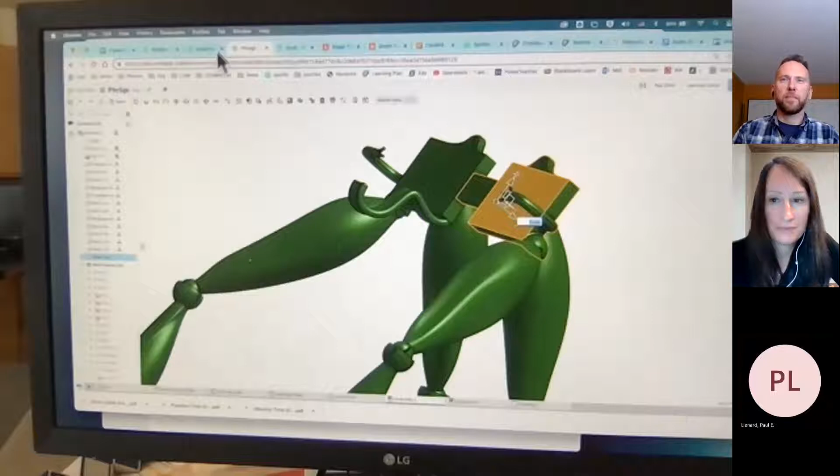The classic one is just Estes rockets. And there it's all about, okay, how big do you have to make? What I do is I have students design sort of alternating parts. So one student does the fins, the next person does the lower body tube, the next one does the upper body tube, and then back to doing the top fin. So you need to collaborate with somebody else to make your designs mash up. And it's about communication, sharing documents, and understanding the idea of tolerances in here.

And I just tell them, we have half a mil, right? Everything's plus or minus half a mil. And that's been our experience with the Replicator. We could work pretty well with that. And if something was too tight, you could work a little bit and it fit. The Sketches, and I've only run these with the Sketches now, not on the Method, but that's almost too much space. We really need to cut it down. And we'll do some work, I guess, to figure out how close we should be doing it.

Yeah. Those sample parts, and you made me think about something here. I'm just going to show you a quick image. What's funny, I don't actually 3D print that much, because it takes so much time and it's expensive. It's really a capstone thing. Like typically, okay, you've worked and you've generated this thing. Now you have it, but it's usually disappointing in the end compared to the CAD file.

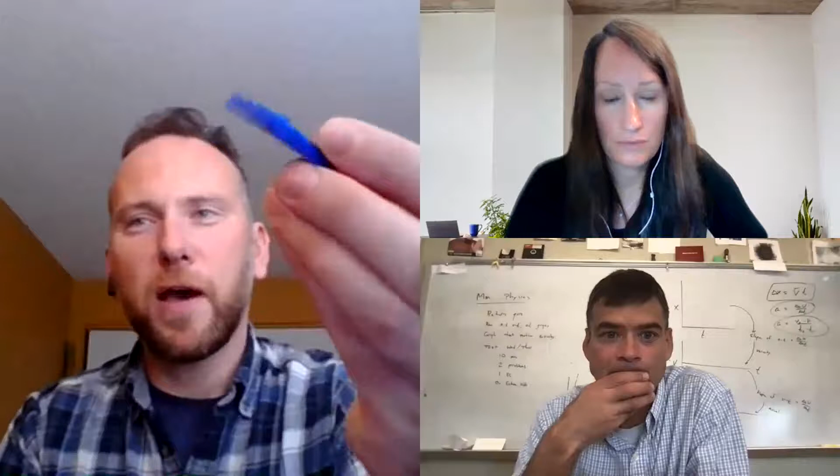And during my testing process, I went back into my CAD model and I printed the corner only. Right. So I printed 2 of the corners to see how the fitting would work. And looking at your student's phone stand, same thing. If you chop off just a little bit where the socket is and print that just to see how it works, it's a great control point. Yeah, that's what we started doing. And that was nice and manageable, right? And we could turn it around in a couple hours anyway. Yep. Very cool.

So yeah, it's fun. Awesome. Yeah.